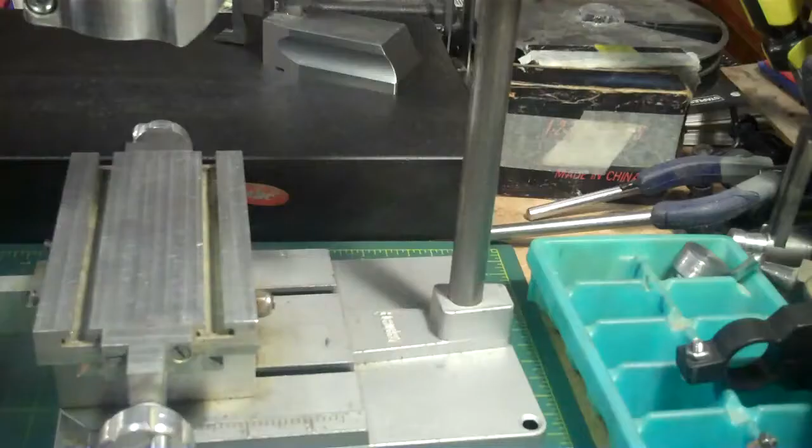Okay, it's time to do the LED lighting source. I have some super bright LEDs, individual ones, but I also have some LED clusters that I bought a long time ago, and these look pretty good to use right here. I think I'm going to make some sort of a holder to put a cluster into that will then eventually go onto the bracket back here and illuminate down here.

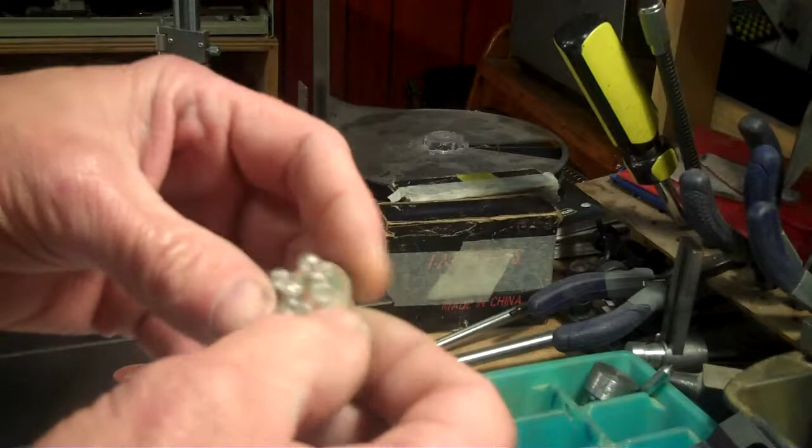Okay, with this LED cluster here, I'm going to try to do some sort of machining, a bracket to hold this into. More or less, it's going to fit inside a flashlight type cone, and then I will also design it so that it can tilt and be locked in any position on a tilt. Again, it would look like an instrument because it would have some sort of a tilting mechanism, a locking mechanism to make it be able to do that.

And here's what I'm thinking. I'm thinking that it could look something like this. That I would have the cone, let's say that we would do it this way here. And this would be the LED module. And it would be in a cone shape like that. And then I could have some sort of a bracket situation going on here that could allow this to rotate up and down to direct the light in any direction I needed to.

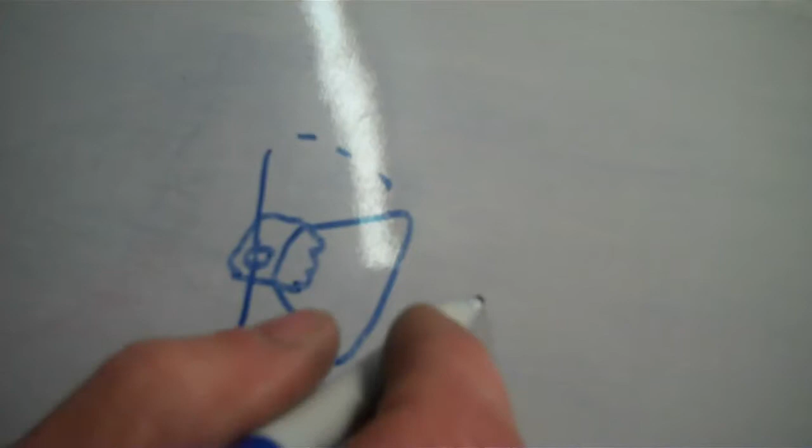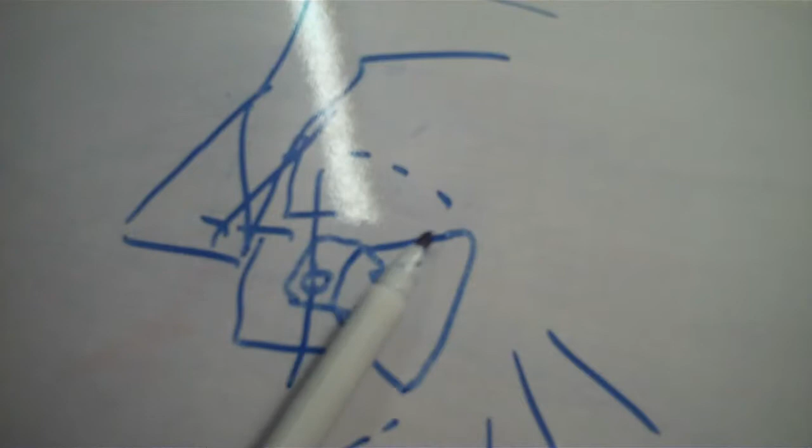And that will be a bracket that would rotate onto another bracket that will be able to be screwed into the actual project itself. There will be a bracket holding a rotation device that would hold the LED in a cone for locking in a position after rotating it. So let's see what we can come up with here.

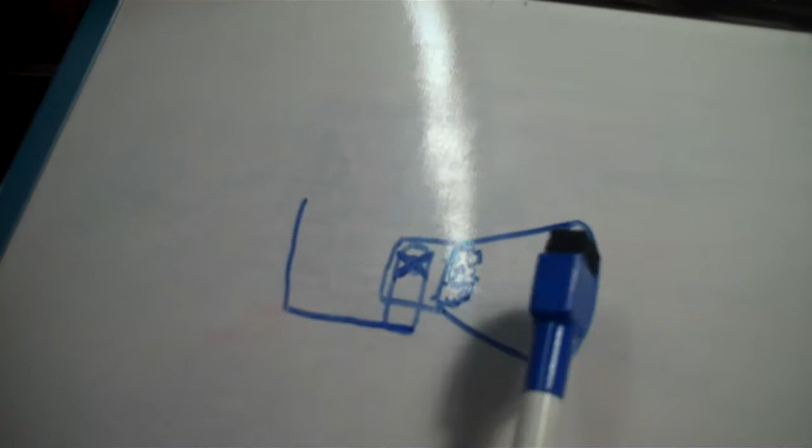Okay, I cleaned the drawing a little better now to give myself a better understanding of how it's going to work. This is the reflector right here, the LED module inside here. Then on the back side here, I would have a bracket coming out and coming up, and there would be a screw tightening right here so that this can be adjusted up and down and then tightened with a bolt right here, a small screw tightened.

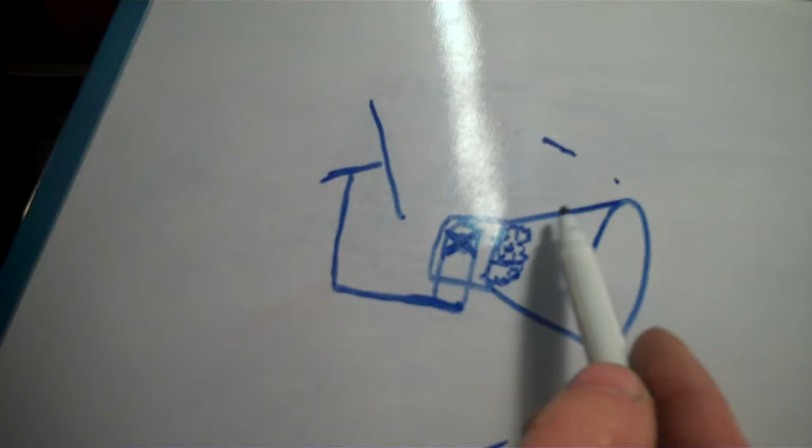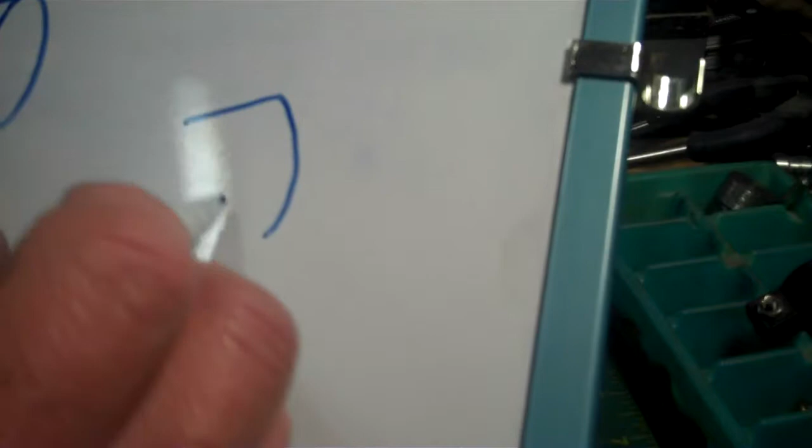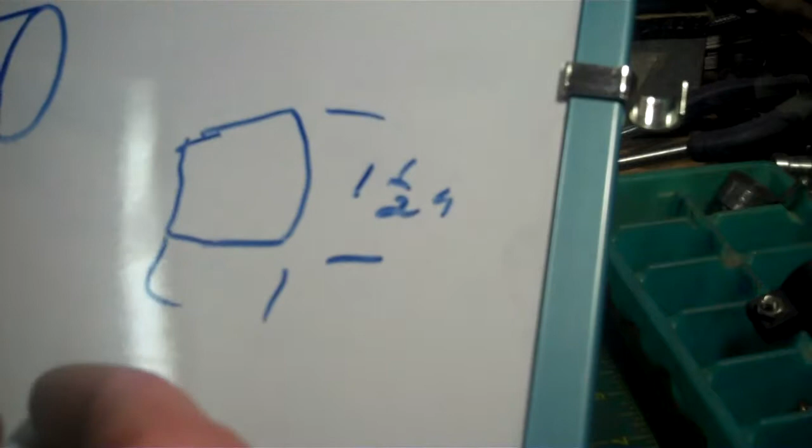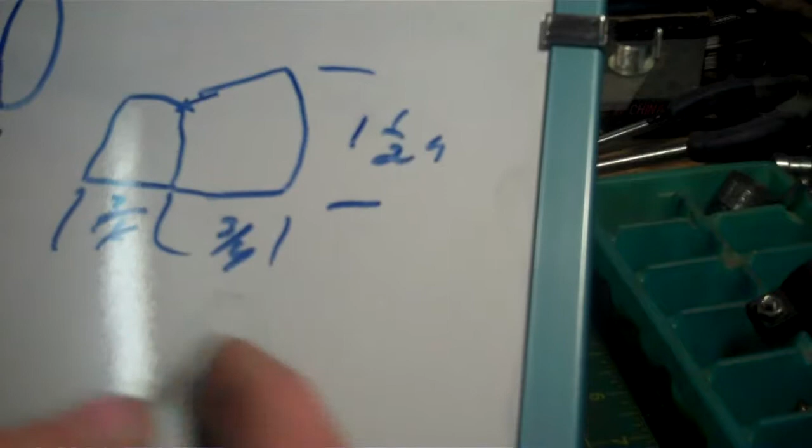Okay, now for the actual dimensions I will use, I'll make the cone, the reflecting cone. It'll be 1.5 inches in diameter. It will go back 3/4 inch, and then it will have a tab on the back side, another 3/4 inch. So it'll be a total of 1.5 inches by 1.5 inches stock, round stock.

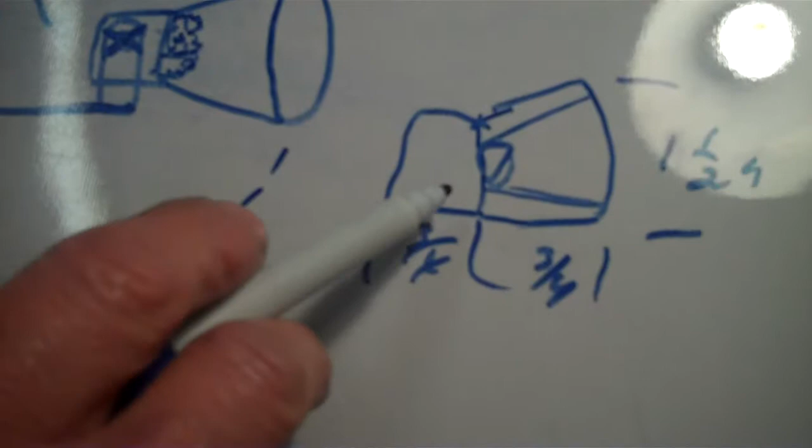And then I will machine that to the cone so that it ends up being around 3/4 inch on the back side here, 3/4 inch in. And so I'll have to get that angle and then set my compound to that to get the cone feature with this back tab here. Okay, there's the dimensions I'm looking for.

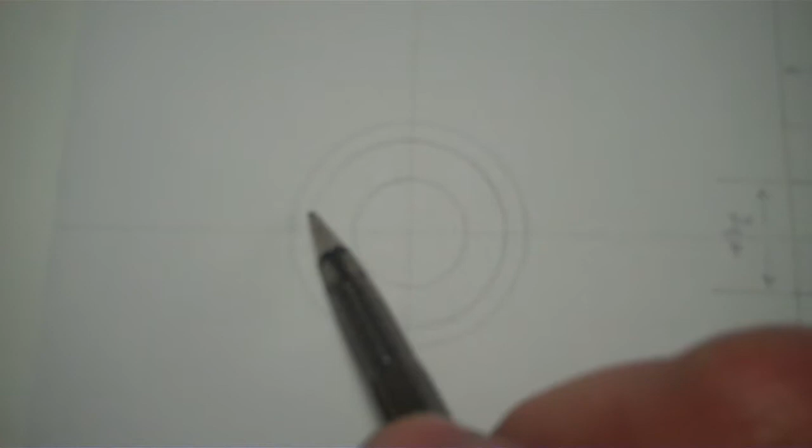Okay, here's what I got drawn up so far. This inner circle represents the LED, which is 3/4. That's the module. Then I'm going to use about 1/8 of an inch for starters of a rim. And here's a side view of it. Now I need to solve for this angle right here, angle A.

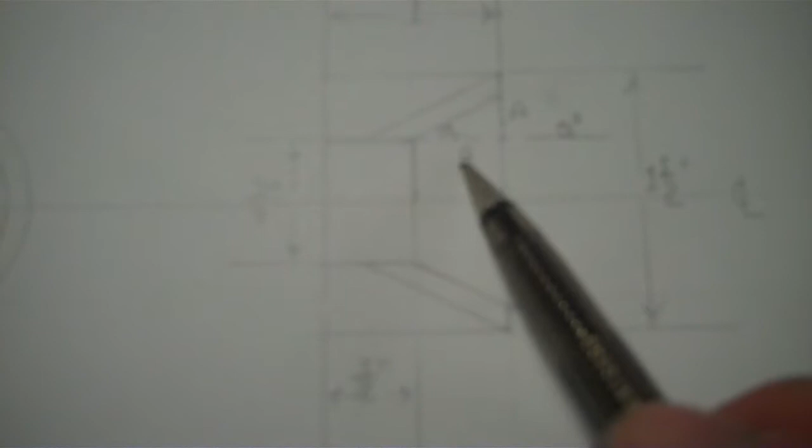Now we know that in trigonometry we have the arctangent, the opposite divided by the adjacent. So the opposite side to angle A would be this large A right here, which is this distance from here to here. And the adjacent side to this is this line B right here. So the tangent of this angle would be the opposite divided by adjacent, which is A divided by B. But now comes the part of solving for these lengths.

Okay, I know I have 3/4 inch for the module. This is the center line right here, so if I take half of that 3/4, that gives me 3/8 from here to here.

According to this here, this is 1.5 inches total diameter. I have 1/8 of an inch rim, so now from here to here is 3/4 of an inch, from center line to the top is 3/4 of an inch. That's 6/8 minus the 1/8 for the rim. That gives me 5/8. So from the center line to this point right here now is 5/8 of an inch.

Now to get to this point right here, we have half of this 3/4, which is 3/8. So we now have the 5/8 minus the 3/8 gives us our 2/8 or 1/4. So for A, we have 0.250 inches. For B now, we have 1 inch for total length. 1/2 inch is the module, and then that line goes from the module out to the total length here, so it's 1 inch minus the 1/2 inch, or 1/2 inch for B.

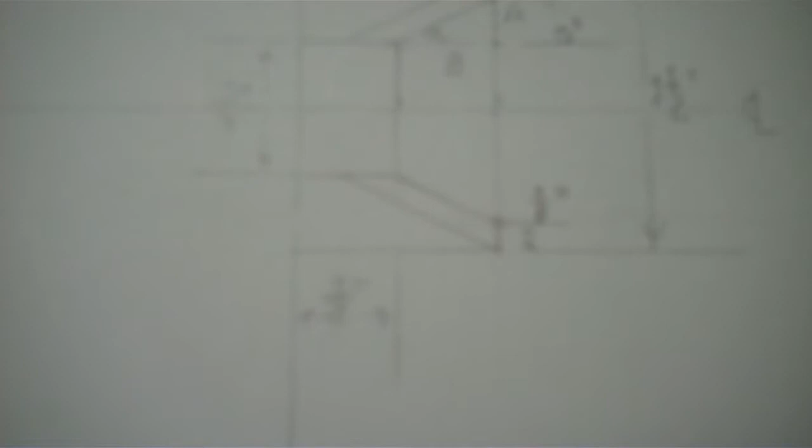So 0.500, and we'll now take 1/4 inch divided by 1/2 inch. We take the arctangent of that, and that should give us the angle A, using this as 0 degrees here, the incline here, and this 0 degrees represents the bedways on my lathe. Okay, let me get this arctangent figured out on the calculator. Okay, that comes out to 26.5 degrees.

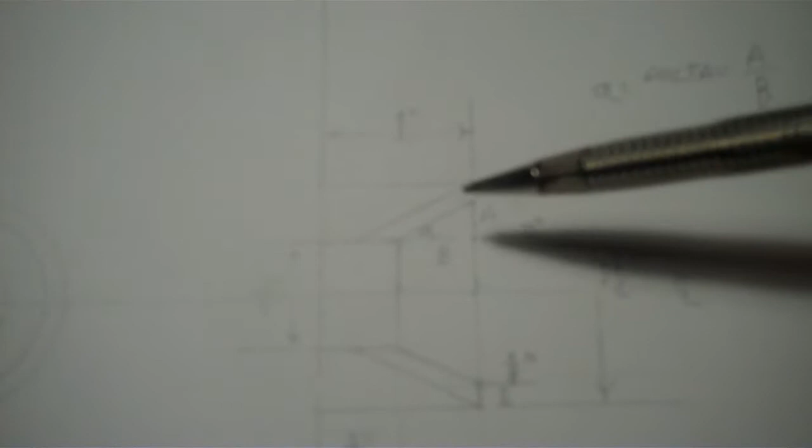So then I'll be adjusting my compound slide to 26.5 degrees in that range there to get me pretty close to this kind of angle of a bore. I'll be boring at that angle, and I will also do the outside angle on this very same setting at 26.5 degrees. And I will leave a nub back here that I can use to assemble that to a bracket.

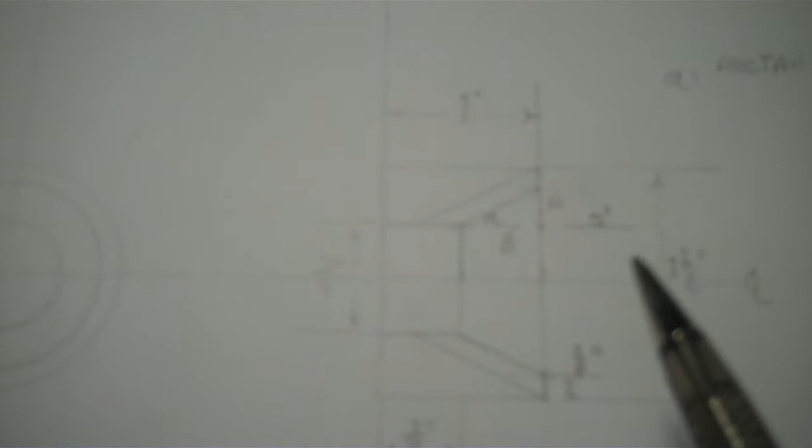So I need to think about how I'm going to work the workpiece now in order to do this machining. I have to think through the machining steps to get maximum efficiency of not wasting a lot of material. And that's what I'm going to show next. Okay, it looks like the best way to machine this piece would be to keep the whole long bar, which I have right here, instead of cutting a small piece off. And then on the tailstock end, I would machine this nub all the way up to this point right here.

And then once that's accomplished, I would set my compound slide, and I would machine this outside taper from the nub all the way out. Once that is done, I would cut it off to the exact length it needs to be. Then I would turn it around and put the nub to the chuck jaws. And then I would do the internal boring to get the module to fit in here, and then the internal taper boring for this part here.

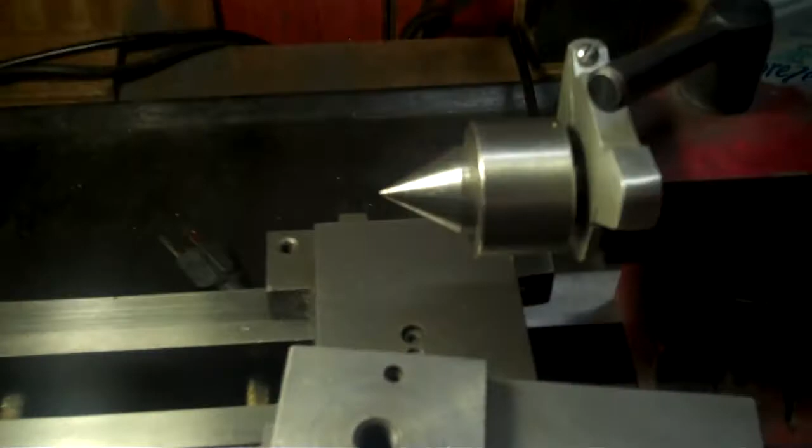Okay folks, I have a 7x10 lathe. My workpiece is around 9.5 inches. Now of course, using the 3-jaw chuck, you can see there's no way it's going to fit. I think we all know by now that the 7x10 means that the 10 inches is always in between centers. However, my center is the live center here with ball bearings, which takes up a lot of real estate too. So I would need a smaller dead center in there, which would go in farther. And of course, I'd have to have my plate on there so I can turn between centers.

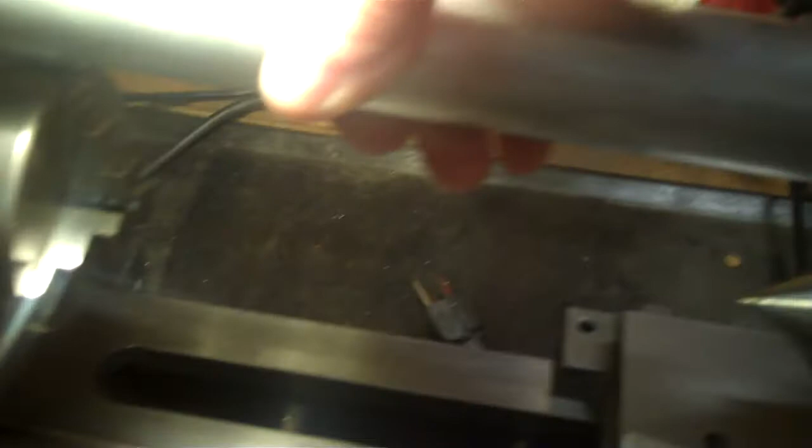So anyway, I don't have a dead center for here, this is all I have for the live center. I do have some plates made up that I can take this chuck off and turn between centers. But I don't think I'm going to be turning between centers because I don't have enough room.

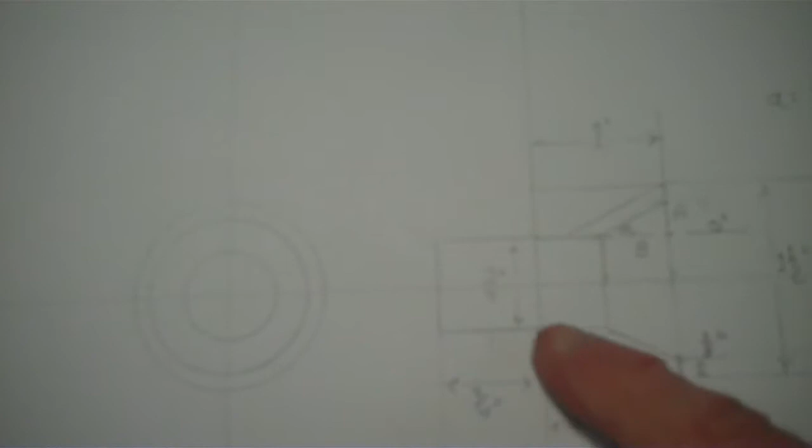I may have to come up with something different. I may have to make a small center, I'm not sure yet. But I'll come up with something, or else I'll just cut this block a little bit shorter to fit in between centers. Because I can't cut it too short to fit this, or else I'll be really wasting material. And the reason why I'll be wasting material is because I'd have to have enough to be able to machine the outside taper. This outside taper ends up on the neck here of this nub. And that's the reason why I have to do it this way.

If it was just an outside taper, like a regular taper ending up at 0 here, then it would work okay. I can just cut the piece and just do the taper. But because the nub is here and then the taper comes out, I can't taper in, I don't think. I'm going to see if I can taper in. I might be able to taper in. I'm going to look at this more closely. Alright, I decided that's what I'm going to do.

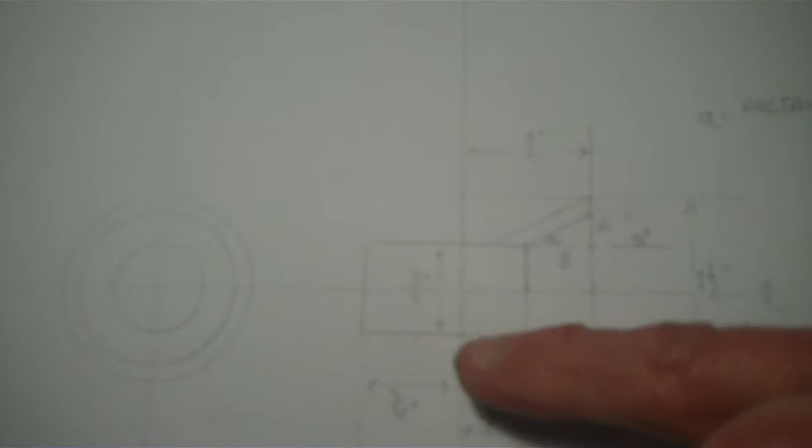I'm going to cut the workpiece to a rough size, saving the material as much as possible, and do the tapering in. I'm going to taper the outside diameter, doing that taper cutting from long, wide to short, and then up at the nub. Usually I always taper from short to long. That's the easiest way, with the short being toward the tailstock. But this time the long is going to be towards the tailstock, and the short is going to be in the chuck jaws, and I'm going to be tapering into the chuck jaws. And I'm going to see if that will work for me.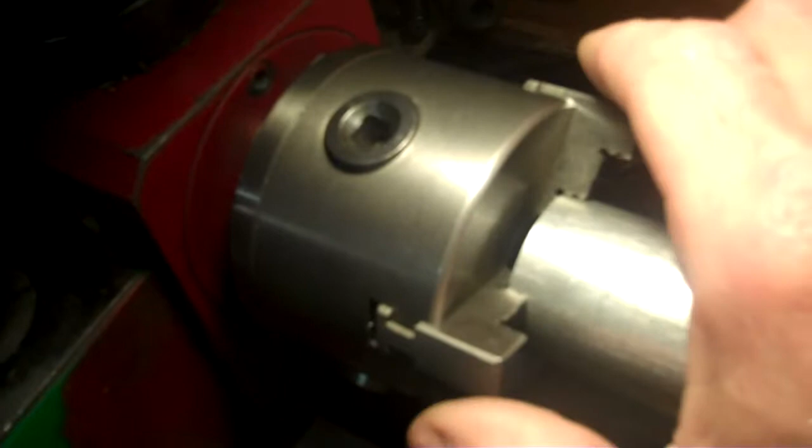Okay, the first thing I had to do is change the chuck jaws to be able to grip outside diameters larger than 1 inch. This is 1.5 inches, so I have other jaws in here now. But because these ends are cut kind of crooked, one done with a hand hacksaw and the other with a bandsaw, they're not perfectly straight. I'm not going to put the workpiece all the way tight to the back of the jaws, but instead put it in just enough that I can have some movement.

I'm going to put my dial indicator on there and clock that in as best I can. By giving myself a little bit of room behind here, I can move this back and forth, and once I get it clocked in, I'll tighten it up nice and tight and start doing the facing. Once I get one side faced really good, I can put that tight against the back jaw and face the other side, make it parallel. Okay, so it's right back here that I want to do all the facing on.

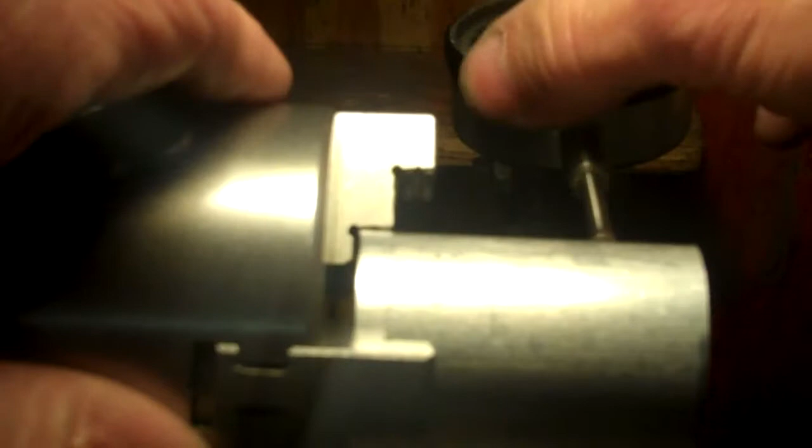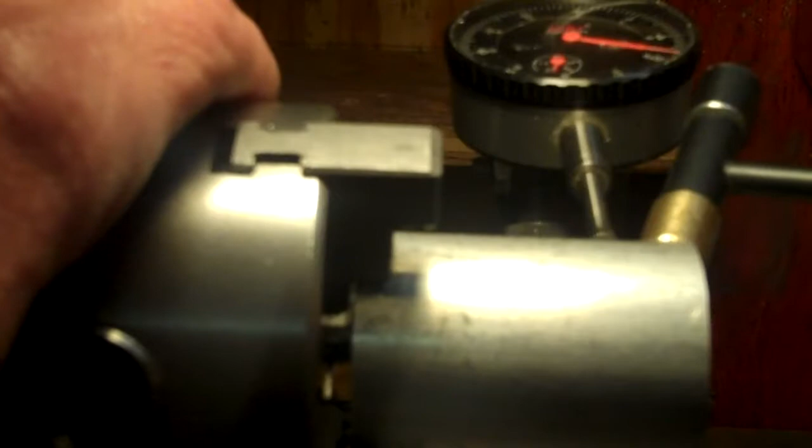I have the dial indicator as close to the edge here as possible on the back side, and I'm now watching for the lowest. And there's where it's the highest. So I'm going to tap this way a little bit, and keep on tapping until I get where I want it. Close enough here. I'm going to start tightening up a little bit now.

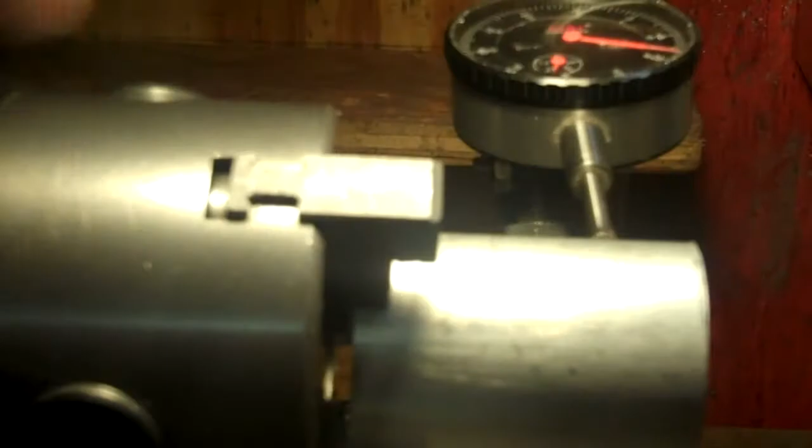Okay, now I have it pretty much where I want it. I'm only within about maybe 1 or 2 thousandths. And again, this is not machined on the side here. This is rough also. So that gets me close enough. I can now tighten all the chuck jaws all the way. A nice good grip here. Okay, I'm satisfied with that. That's enough to get me within range that I can now face this off and be pretty close to being concentric with the diameter.

Okay, now I should be able to put it right tight to the jaws and be pretty close to being parallel. I don't think I have to clock it in; I'll just take a look and see how it is. Yeah, I think it's real good.

Okay, this goes down about an inch. It doesn't have to be perfectly an inch, but just within that range. That's for the nub. That's going to be gripped in the jaw.

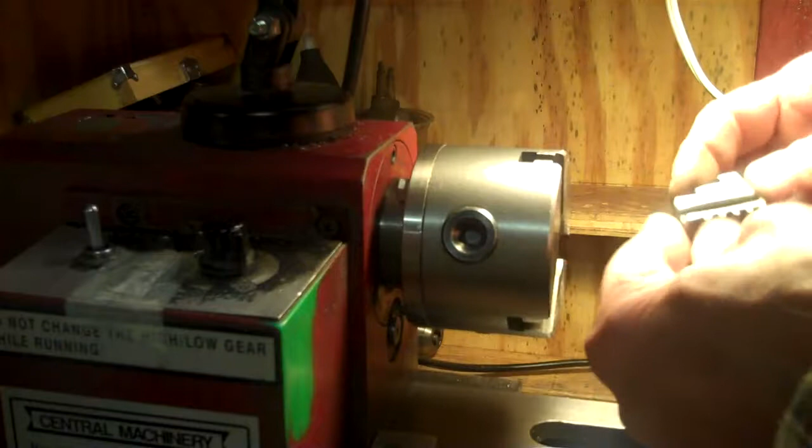Okay, good. Time to change out the chuck jaws and go back to smaller ones now, since I have a good nub that I can grip onto now.

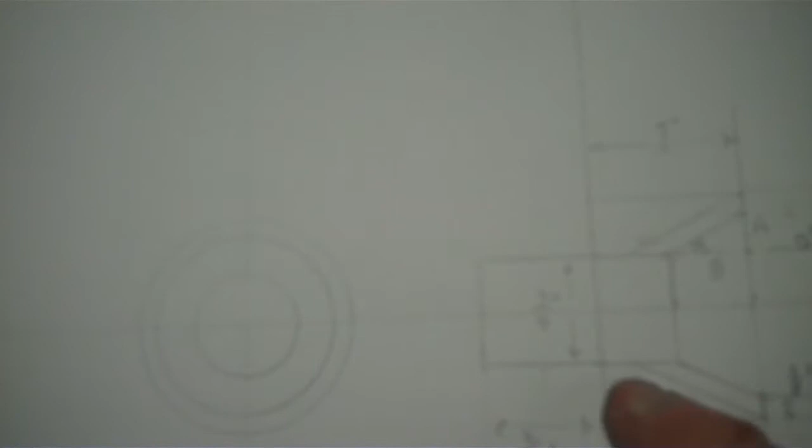Okay, I think what I'm going to do is I'm going to do the outside taper first, down to that nub, and then I'm going to do the inside bore taper, and then do the boring to fit this inside, and then do a small hole out the back to pull the wires through. Okay, my compound will be set to 26.5 degrees. And we turn in this direction here this time instead of out. Alright, there's 30.

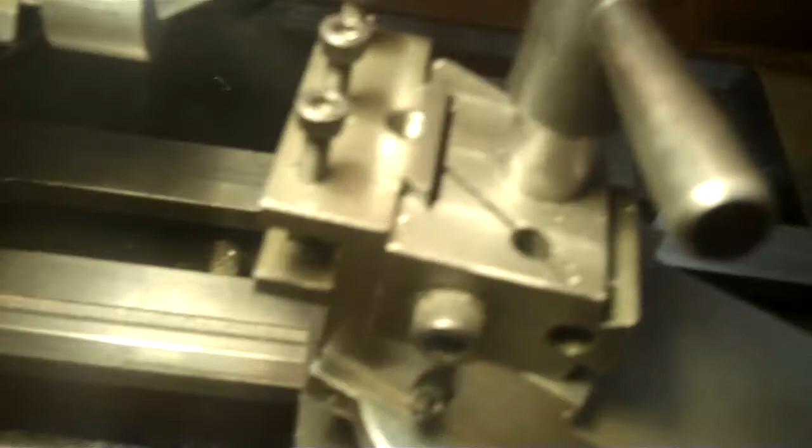Okay, I have that nub machined out to here, and then I have a high point here where my chuck jaws are, right here on this point. So all I'm going to do is machine from the outside edge back to the inside edge. I'll be machining this taper from the front edge here to the back edge. When I come out the back edge there, I know that I have the taper to the length it needs.

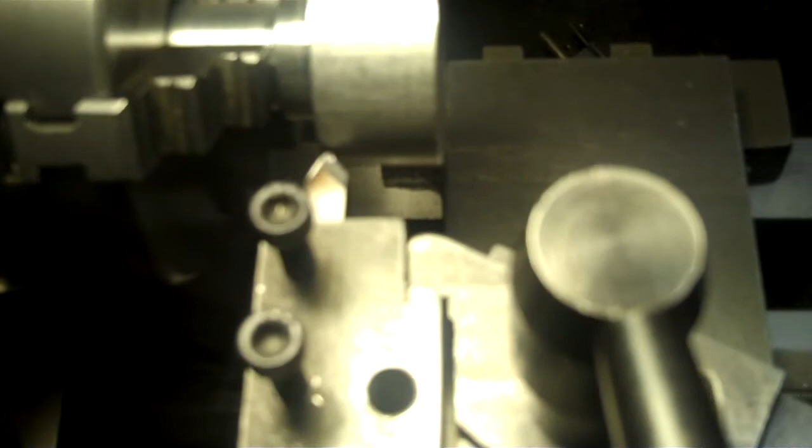It looks like the plan of attack is this. I'm going to be tapering a little bit this direction here like this, pull back, bring my cross slide in further, come in, pull back, and just keep on going until I reach the front edge here. When I reach the front edge, then I have the exact amount I need of taper.

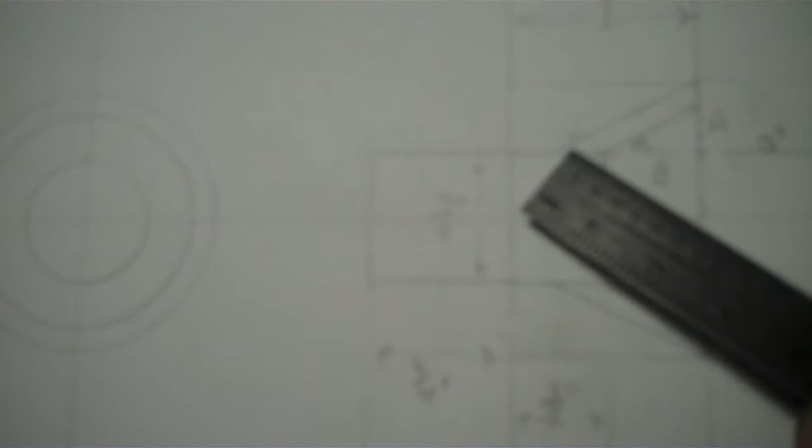I just realized a mistake right here. This outside angle has to be less than the inside because this inside is coming right down to the 3/4 where that fits into. This outside has to leave some meat on here. So I'm going to change this outside angle to make it lower so that it doesn't meet right into the 3/4. It meets above it about 1/8 of an inch. So I'm going to change this outside angle. That means I'm going to change it on the compound here too, or else I'll be taking too much from the outside. Okay, here we go.

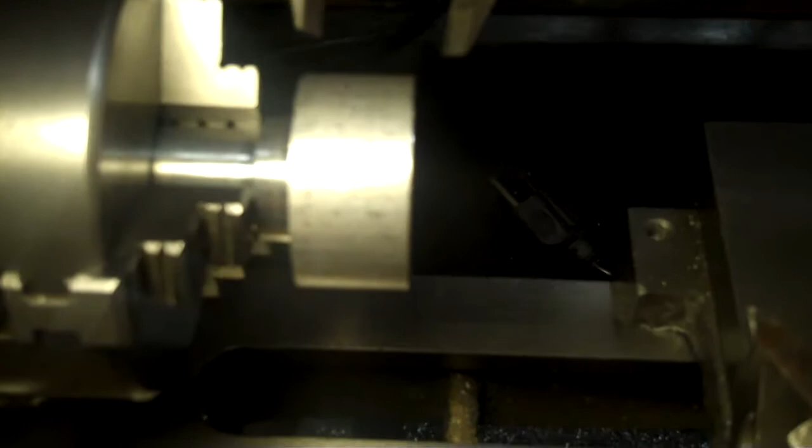This outside here is 1.5 inches. This inside here where this taper is going to come down to is at 900 thousandths of an inch. This distance from here to here of the taper is roughly 750. It's about, let's see here, 770. I'm going to go with 770 just like it shows here. So I have the distance, 770. Now here's the height from here to here that I need to get. And that height is going to determine the angle. The height is around 290.

So to get this tapered angle, the taper would be the 290 divided by the 770. The arctangent of that would give me the angle. Okay, that comes out to 20.6 degrees, so I can set my compound to 20.6 degrees to do my taper. That would take me from the front edge here and end up on top of here, which is above the 3/4, so that my 3/4 will fit inside there and not touch the module. But the inside taper will touch the module on the inside.

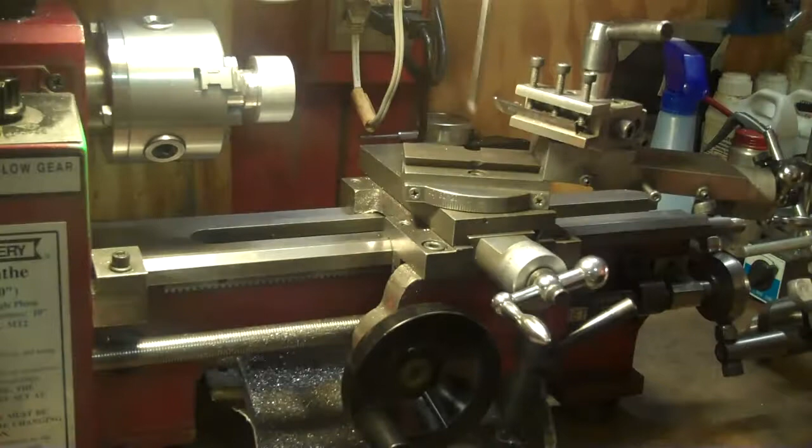Okay, let's get this at 20.6 degrees. 20, 21, about half of that is 20.5, 21, about a little past the 20 should do it. That's about 20.6, 20.5 degrees. That should do it there. Now I'll put this on and I'll double check this.

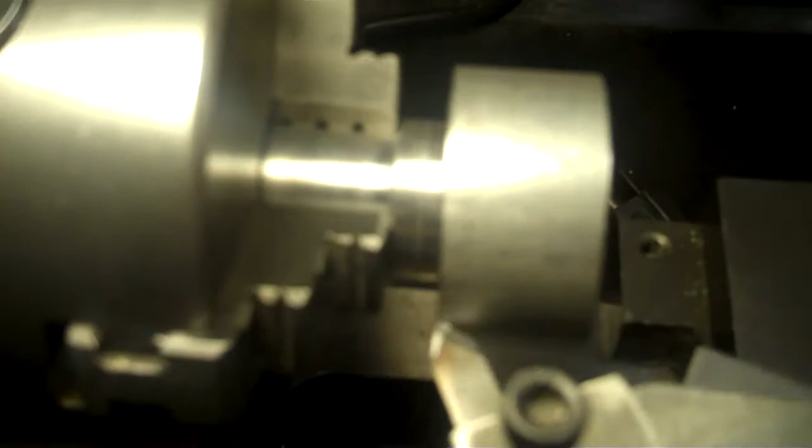Okay, now just for the check, by having my bit touching at the edge, on the back edge, I should be able to pull this back now on this taper angle, and I should have the same amount on the front edge coming into the bit, which is around 5/16 distance from the front edge to the tip of the bit. I should have close to that same distance here coming in this way.

So I'll just take it from the top here and look at it. And very, very close to 5/16. So that verifies that since this distance is pretty close to the distance from here to inside here, that's pretty close to the degrees that we need. Okay, we'll give it a try here. I got my carriage locked. I'll advance my cross slide, come in.

One thing, I got to keep my bit straight in. That's just a little bit too much taper on the bit itself. I got to put a different bit in there. Okay, I got my 60-degree threading tool in there, and I got it squared up. And that's all that matters. As long as it's squared up, it should work properly. Okay, here we go. Able to see that.

Alright, next is the inside bore, which I gotta adjust the compound to 26.5 degrees to do the inside. But first of all, I'm going to do the 3/4 bore in here first, so far down to put the module in, and then we'll do the taper boring later on.

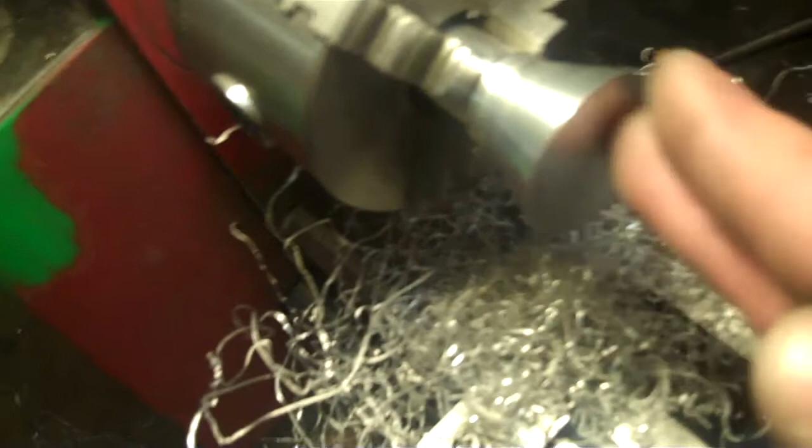The next thing is to bore the front now to 3/4 inch, that the module will fit in like this. That module is going to fit right into that area right here, that raised area right here. It'll fit back into there like that and stop, and then this will get bored down to that 3/4 hole. So there's where the module is going to be sitting at, the LED module.

Okay, I can go to a depth of 1 inch off the face of this here, and that would allow my module to fit in here, back to this back side here comfortably. I have a dial gauge set up here on my tailstock here for drilling, and I'll use this dial gauge against this, and that will tell me. I'm going to stop this at about 900 thousandths, possibly. But I do have the tip here.

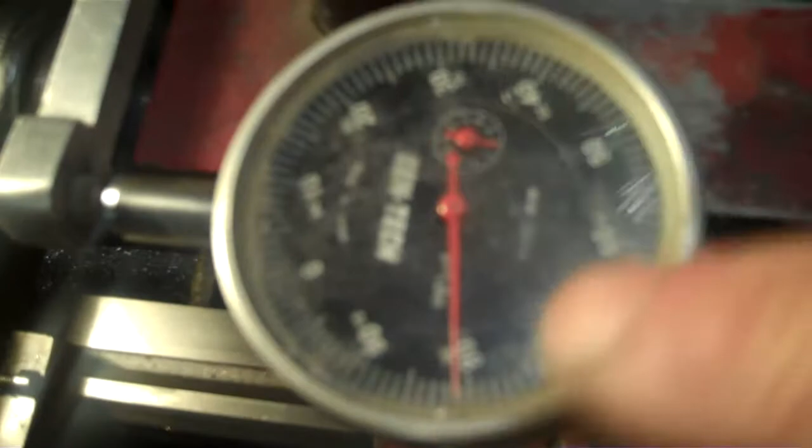I'm going to have to take some measurements here and decide where I want to stop this at using the dial gauge. I'm going to run my drill bit in until the face of it here touches the face of that. That way I know the length of the point, and I'll use my gauge here to tell me when that happens, and then I will know exactly how many thousandths that point is.

I'm at 50 thousandths right now. 70. 100 thousandths. 125. Right there, I would say about 150.

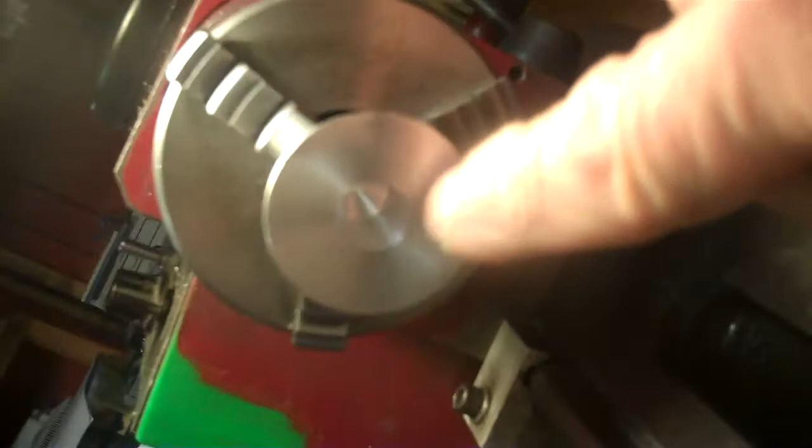150. Okay, there's the hole drilled with a 1/2 inch drill bit, and it goes back close to about 1 inch. The next thing to do now will be my boring bar. Now I'll bore that to 3/4 or close to what's necessary for that module to fit in. This module right here again is shown. I want to get that to fit in. So we got to bore that to this diameter here now.

But since this is electrical, you run off a battery; the ones on the outside are the cathodes here. If that's touching this here, this would just be the negative wire. But I want to get a little bit of room so I can put a little bit of hot glue in there and keep this isolated from the metal. So I'll go to 750 thousandths. I'm at 730 right now, 730 thousandths. 20 more to go.

That should give me enough room to get inside there with some glue. Some hot melt glue should take care of that. Alright.

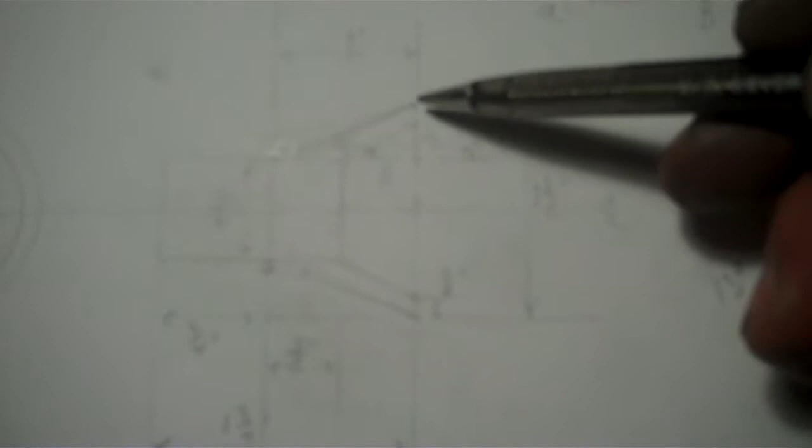Next will be the taper bore. I need to get the measurements now for that, how far back that goes, and we'll take it from there. Okay, according to my calculations that I drew up originally, when I have an 1/8 inch rim, I should be back where I need to be in the taper bore, the distance I need to be when I go with the 26.5 degree taper angle on my compound slide.

So I'm looking for an 1/8 of an inch rim. So that's what I'll be doing here. When I get that 1/8 of an inch rim on here, I know I'll have that back to where it needs to be. So first of all, I need to change the compound now to 26.5 degrees. Taper bore coming up. Let me lock my carriage. Put a stop here. Alright, here we go.

Making a picture tube, TV picture tube.

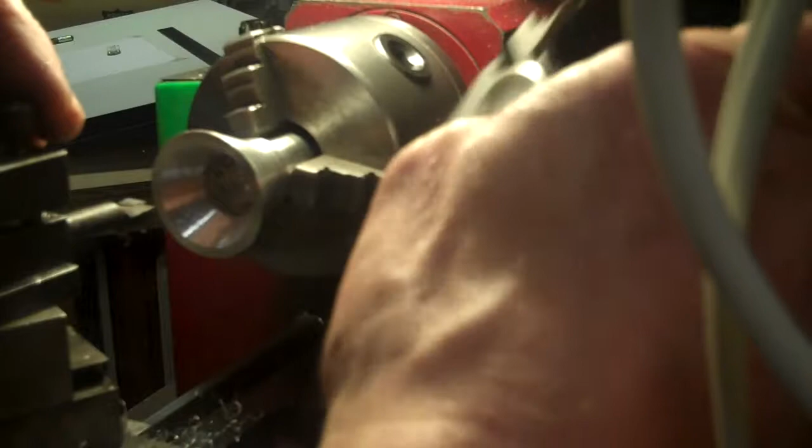Now. 55, 45, 35, 25.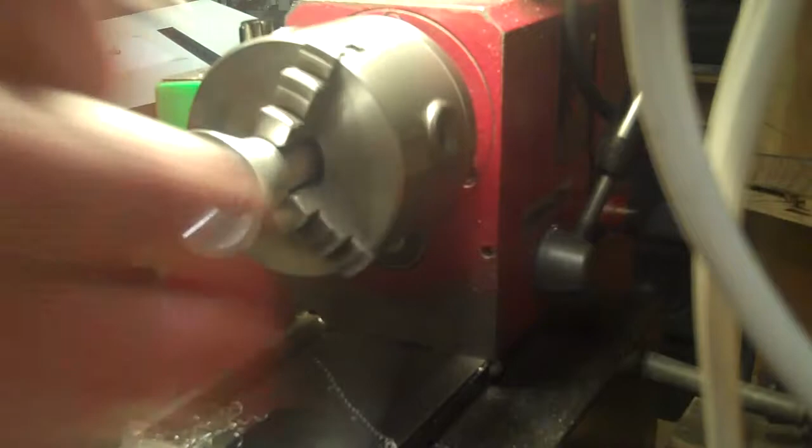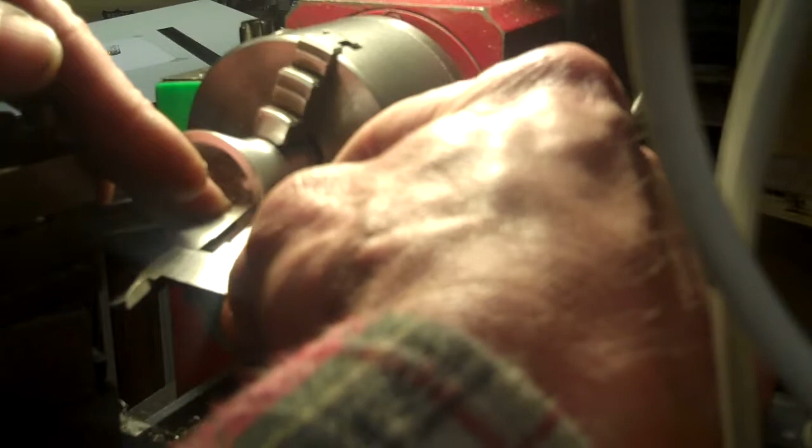That's about 135. Now I may take it more down, less than 1/8 of an inch, because I think I might want to even get down to a 1/16 of an inch. We'll see how it works out. I'll just take a little more at a time here now.

Okay, there it is so far. Okay, the last operation on the lathe here would be to drill the hole to put the wires through. I'm using a 3/32 inch bit, or I'm sorry, 7/64 to drill this hole through.

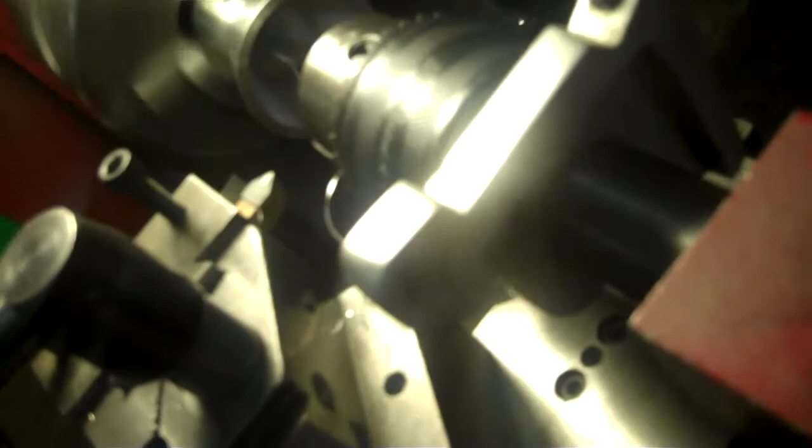That hole is a little bit small, so I'm going with a 9/64 bit instead to enlarge the hole. That's at both sides there. Alright, okay, that looks like that's about all that needs to be done in the lathe. Here's the back side of it, front side of it. Yeah, the better size hole for it. There it is. Just like we drew up this evening.

There's the front view of it, and here's my side view. Yep, that looks good. I like that. Alright. Next thing will be to put the modules in. Put the module in there, probably some hot melt glue. Run the wires through, of course. Hot melt glue it.

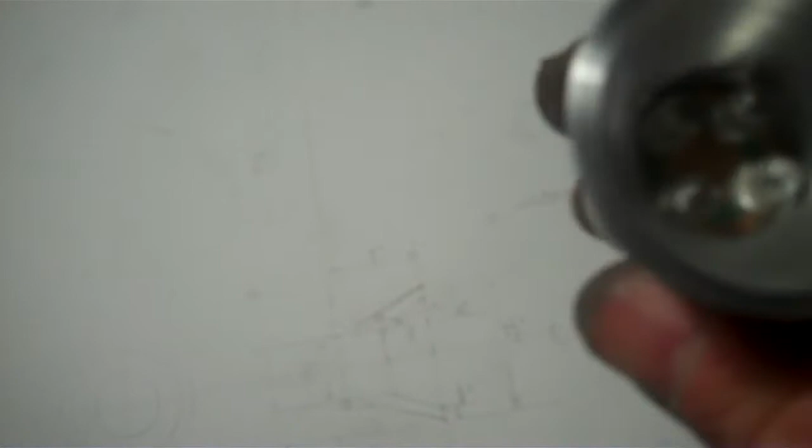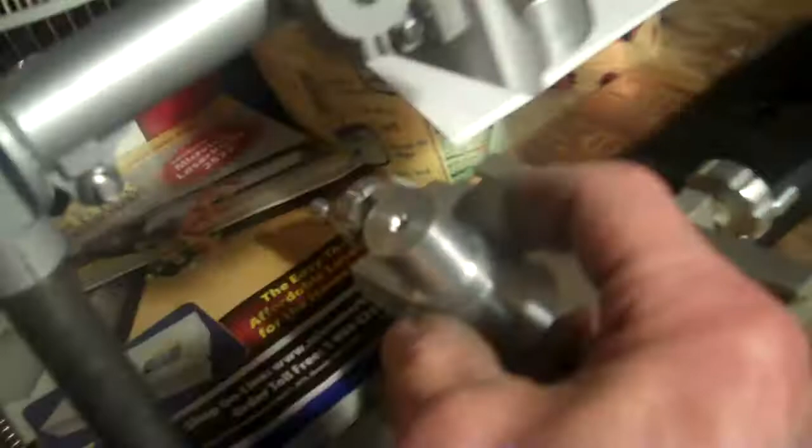But before I do that, of course, I got to make the stand for it. I have to make a bracket for it now for it to swing up and down. And that will go on the back side here of the press. It would go back here somehow like this. Make some sort of a bracket that will allow it to swing this way or that way, whatever it needs to swing.

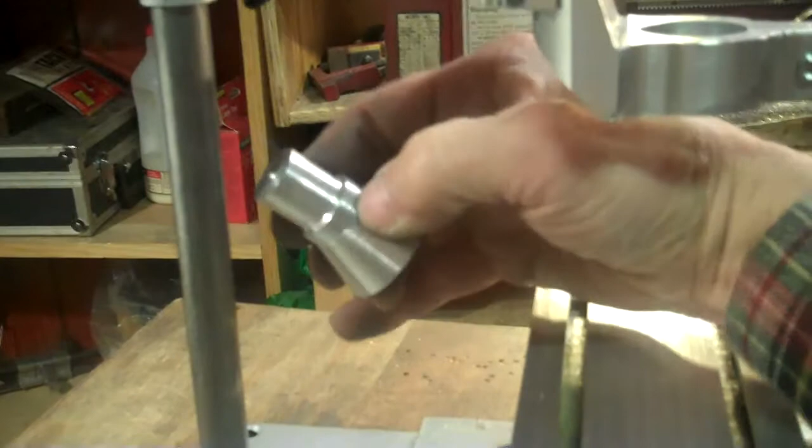Okay, that might be all for tonight. I may just put it on the bar back here, make a bracket to put on this bar back here, and let it be stable, and I can actually adjust it one way or another, but have it attached to the bar. Yeah, I think that's what I'm going to do. I think I'm going to do it with the bar instead of put it on here. On the bar here, be like a spotlight for it, and I can maybe adjust it this way here. That way it won't be moving up and down, it'll just stay in one spot. Alright, that'll work.